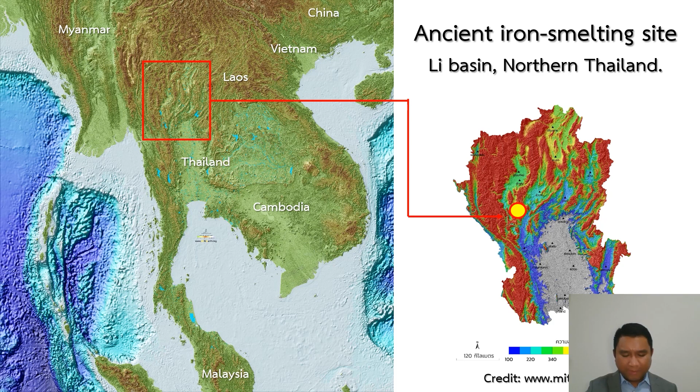Chapter 1, I will present the ancient iron smelting site from archaeological study in Li Basin, northern Thailand. The study area, Li Basin, is located in the north of Thailand, which is a part of mainland Southeast Asia, currently surrounded by countries such as Myanmar and Laos.

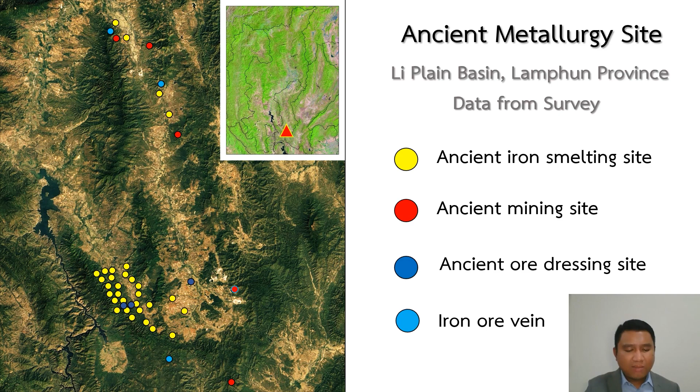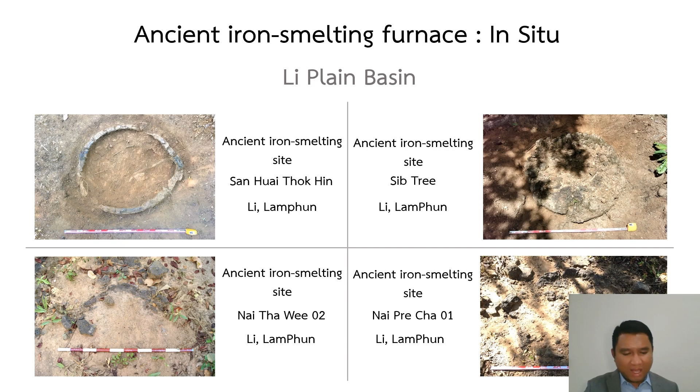In the archaeological survey over the past 5 years, we found 50 ancient metallurgy sites, including ancient iron smelting sites, ancient iron mining sites, ancient ore dressing sites, and iron ore veins. The most significant evidence which we found in this survey is the smelting furnace. Luckily, the furnace is in good condition. We can study its structure.

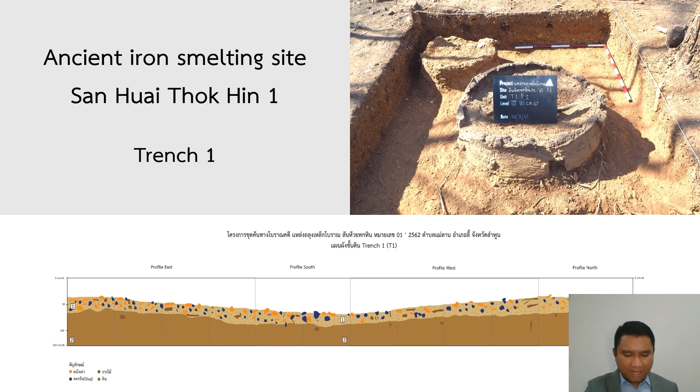In 2018 to 2019, we had an excavation project. Following the picture, we did more excavating and kept some artifacts to analyze in the laboratory with scientific methods. We found some interesting archaeological evidence. This is two in situ iron furnace structures, which were found in San Huai Thok Hin number 1 site. The soil profile represents that the smelting activity was in process for a short time. The smelting layer is only 30 cm deep.

Let me show you an in situ shaft furnace. The diameter is 90 cm. The furnace wall has a blowing hole which has its exit tilted at 30 to 45 degrees. On the bottom of the furnace there are 4 slag tap holes.

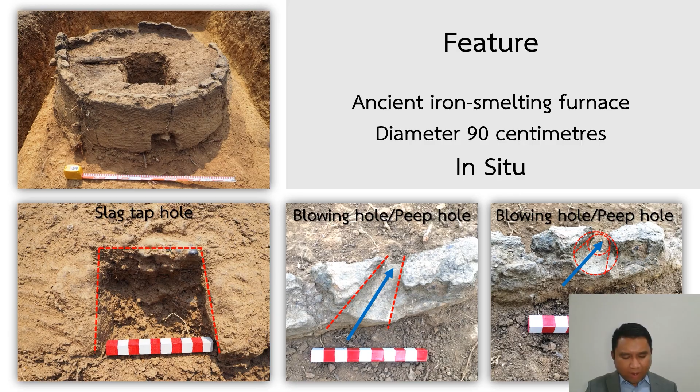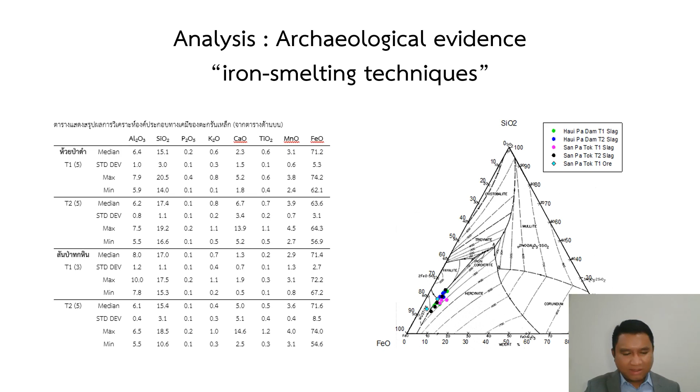According to the handheld XRF analysis result, the smelting temperature of both sites is about 1150 to 1300 degrees Celsius. The smelting technique is direct process. The type of furnace is shaft furnace made from purely clay. The diameter is 70 to 90 cm and 150 to 180 cm high. It has blowing holes surrounding the middle of the furnace body and 4 slag tap holes on the bottom of the furnace.

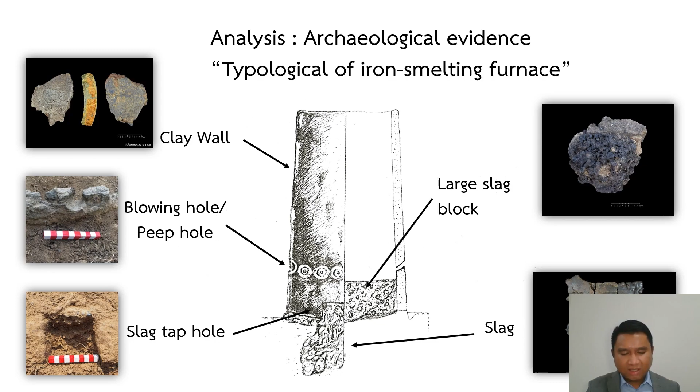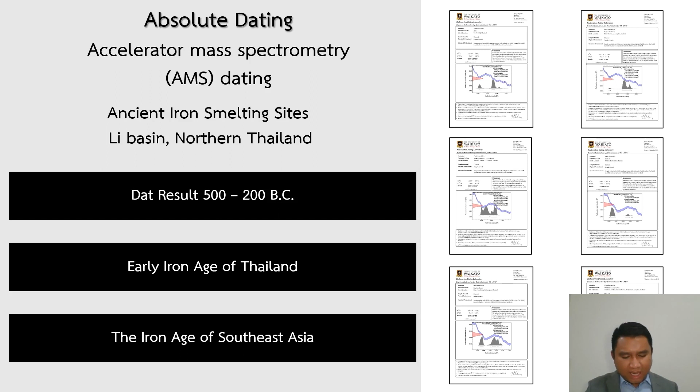This is AMS dating from charcoal found inside slag from Li Basin: 500 to 200 before Christ. So the dating indicated that the group of iron smelting sites in Li Basin, northern Thailand is the oldest iron smelting site in Thailand nowadays. This iron smelting site is the early Iron Age of Thailand and Southeast Asia.

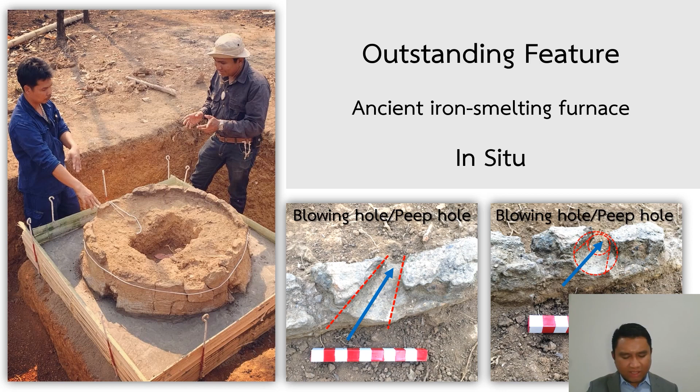Next, chapter 2, let's talk about the latest findings from archaeological evidence on ancient iron smelting technology. As mentioned, in the archaeological excavation we discovered a remarkable ancient iron smelting furnace. It is an in situ shaft furnace. The diameter is 90 cm. The furnace wall has a blowing hole which has its exit tilted at 30 to 45 degrees. The archaeologists assume this blowing hole shows the intention of causing a whirlwind in the smelting furnace.

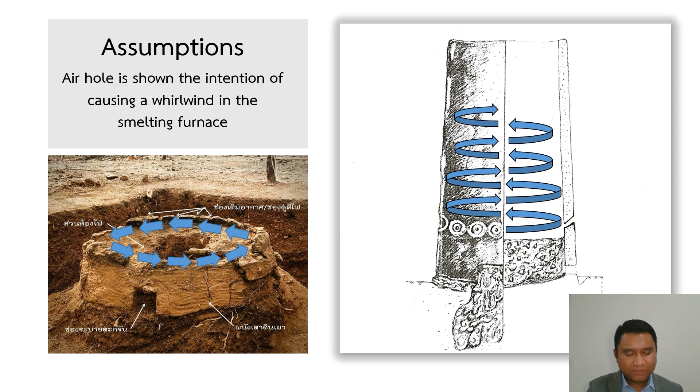To verify the assumption, the archaeologist team studied the internal structure of the furnace until we discovered that inside the furnace, slag was found along the edge of the furnace wall, shaped like a circle. Why did we find nothing in the middle area? So we assume that the blowing holes are likely to generate high heat only around the inner edge of the smelting furnace, and the high heat may not reach the center of the smelting furnace.

The discovery led to the next two questions. How does the whirlwind affect the iron smelting process? And what is the shape of the iron bloom after the whirlwind process?

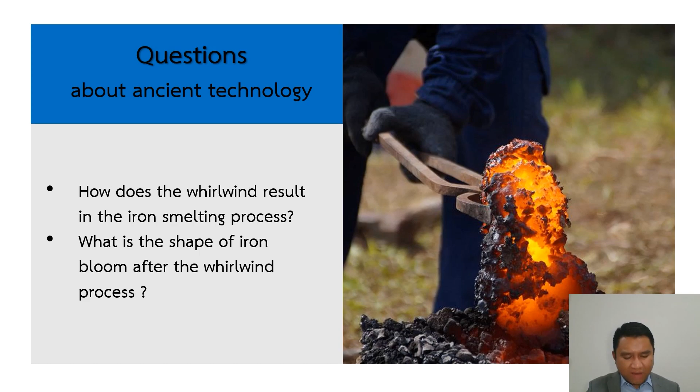Next, chapter 3, let's talk about findings from the synthesis of knowledge through experimental archaeology. The archaeologist team and the expert in iron smelting work together to simulate the ancient technology again. There are two purposes of this study. First, to simulate the pattern and ancient technologies related to iron smelting 2000 years ago, which will lead to knowledge and understanding about archaeological records.

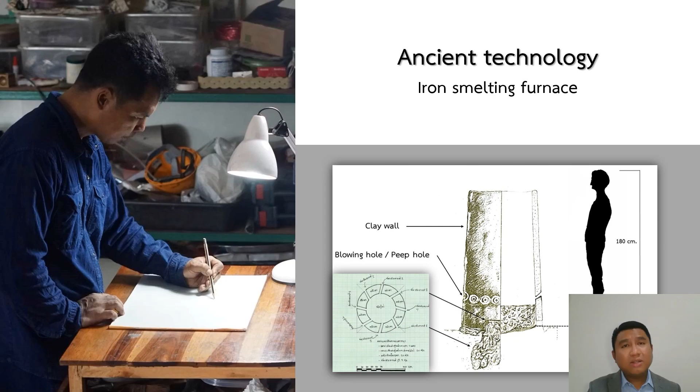Second, to make an assumption about the shape of the product that we obtained from the ancient iron smelting site in Li Basin, northern Thailand. The question of this study starts from the discovery of the iron smelting furnace still in situ, with a cone-shaped blowing hole made diagonally to the wall of the furnace at 30 to 45 degrees, showing the intention of causing a whirlwind in the smelting furnace. From this discovery, what were the factors that resulted in the ancient iron smelting process?

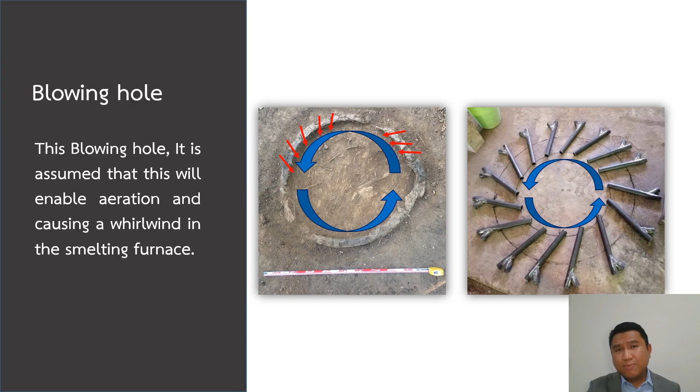To prepare this simulation, we try to choose the materials that are similar as much as possible to those found in archaeological sites. We prepared three materials. First is soil. We took soil from the area nearby the ancient iron smelting site in Lee District, Lamphun Province. Second is charcoal. We used a variety of charcoal which is found in Lee District, Lamphun Province.

The third is iron ore. In this smelting, we use magnetite iron ore bought from a vein which is found in the archaeological site. In the process of soil preparation, we use soil taken from the area nearby the archaeological site. It is sandy clay which has been fermented with water for 3 days. We also knead the soil 3 times to make the soil finer and more condensed.

Next step is forming the smelting furnace. We try to create the same model as much as possible with the ancient assumed form. Clay is used for making the smelting furnace structure. The width of the furnace base is 100 cm. The height is 140 cm. The furnace mouth is 80 cm wide, and the thickness of the furnace wall is 20 cm.

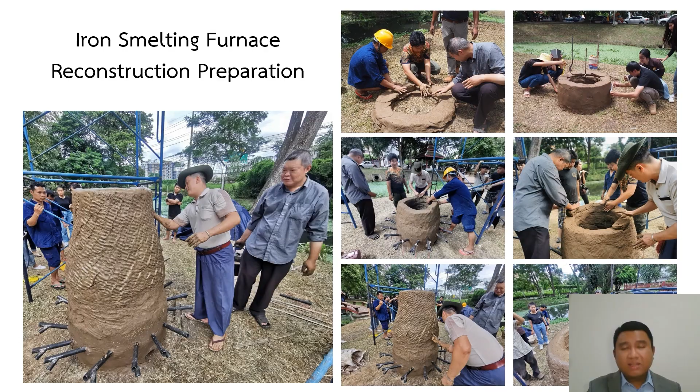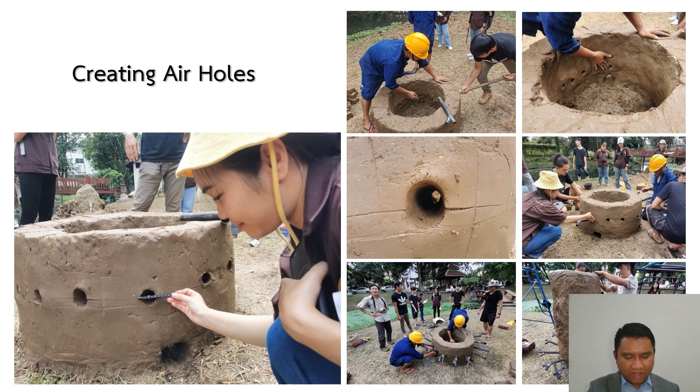Next, making blowing holes. The team has drilled blowing holes 20 cm higher from the base of the furnace and drilled into a cone-shaped hole, at the angle of 30 degrees to the furnace wall. A total of 16 channels are arranged around the furnace. At the bottom of the furnace, square holes are drilled in the 4 directions.

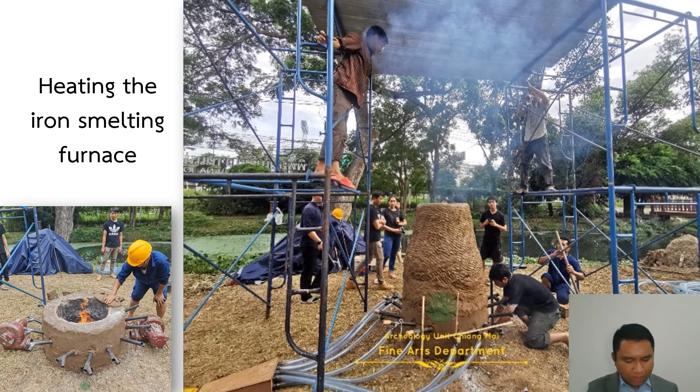The next step is providing heating to the furnace. The team used firewood to build up temperature inside the smelting furnace to make the soil dry and ready enough for the smelting process. Next, we start the smelting process by adding charcoal until the furnace is full, and fill the air through all 16 blowing holes, which creates swirling air in the furnace.

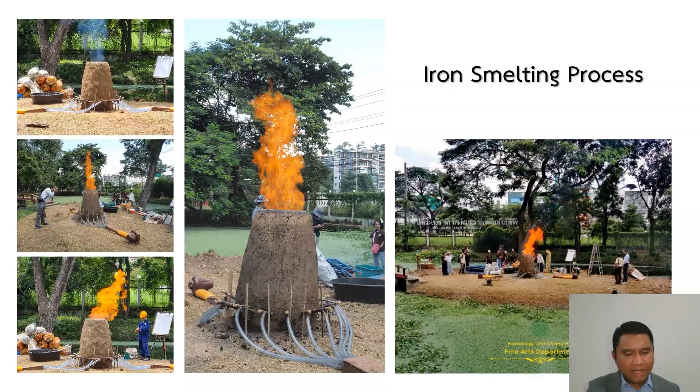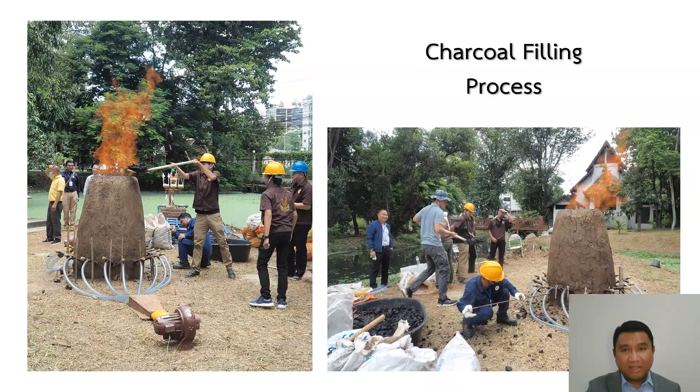After that, the ore was added alternately with the fuel charcoal. The time interval is 5 to 10 minutes, mainly observing the combustion characteristics and keeping records. This picture is the charcoal filling process, which is subdivided into diameters of 3 to 5 centimeters. The next picture is the process of adding iron ore, which was subdivided into a size of 2 to 4 centimeters, similar to evidence we found in archaeological sites.

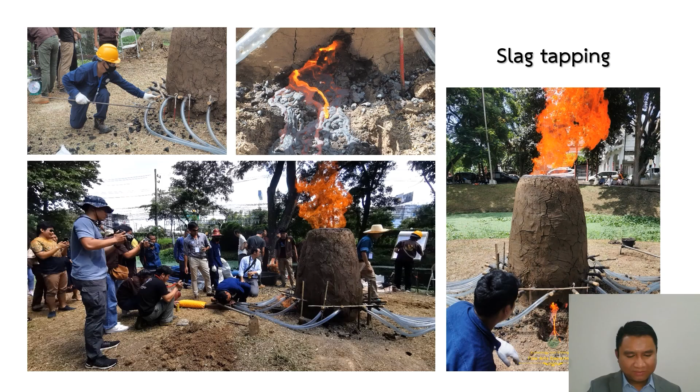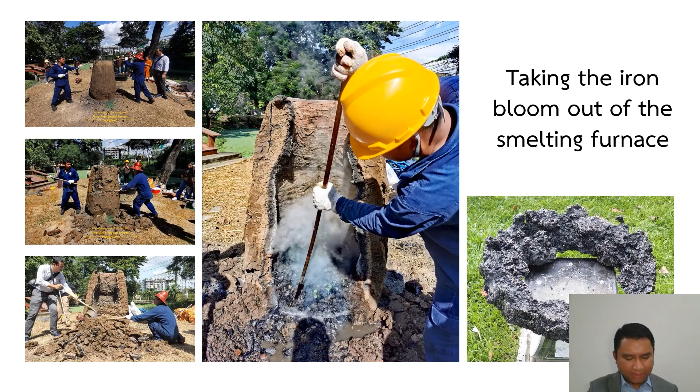Next is to drain the slag out during the smelting process. Through the aeration chamber, the team observed the condition occurring inside the blast furnace. When it was found that there is a high level of slag accumulation, we will drill through the hole at the base of the furnace in all four directions. Next, we took the iron ingot product from the furnace after 4.5 hours. The research team found that iron bloom had accumulated and clogged the aerator. Then we finished the smelting process and broke the furnace to bring out the ingot of iron.

Finally, the productivity from this iron smelting is 47 kilograms of iron bloom in a special ring shape, which I show you now on this slide. If counted with other pieces of iron, the total productivity obtained from this iron smelting is up to 50 kilograms. In this archaeological experiment, 100 kilograms of iron ore and 380 kilograms of charcoal were used.

This experiment generated enhancing knowledge and understanding as follows. First, the issue of resource utilization and productivity. In this smelting, 100 kilograms of magnetite iron ore is used, yielding 50 kilograms of iron bloom. The ratio is 1 to 2, or half, which is considered a higher proportion of productivity than iron smelting by traditional methods in general, with a ratio between production and iron ore of 1 to 3.

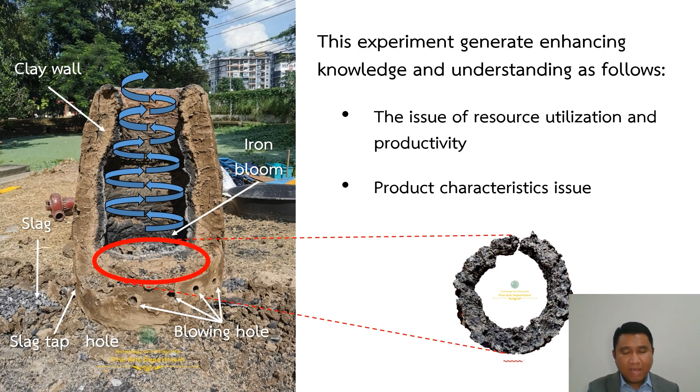Last but not least, suggestions for further development. As this is the beginning of the study of experimental archaeology in archaeometallurgy in Thailand, there is still a lack of scientific equipment used to collect insight. In the future, we expect to provide more scientific equipment to support the experiments and for further development of knowledge.